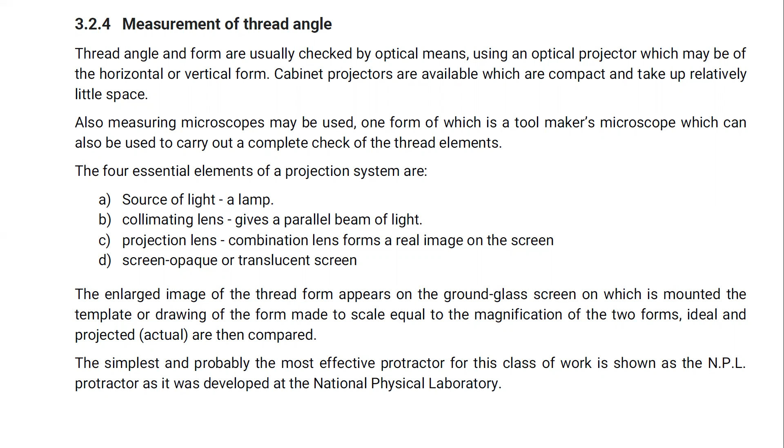A vernier protractor of this type usually has a circular scale calibrated in half degrees, with minutes of arc being read off a tangent screw dial.

Each flank angle is measured separately, the protractor arm being rotated in turn to each flank of the projected thread image. Hence, the thread included angle theta is the sum of the two flank angles, theta/2 plus theta/2.

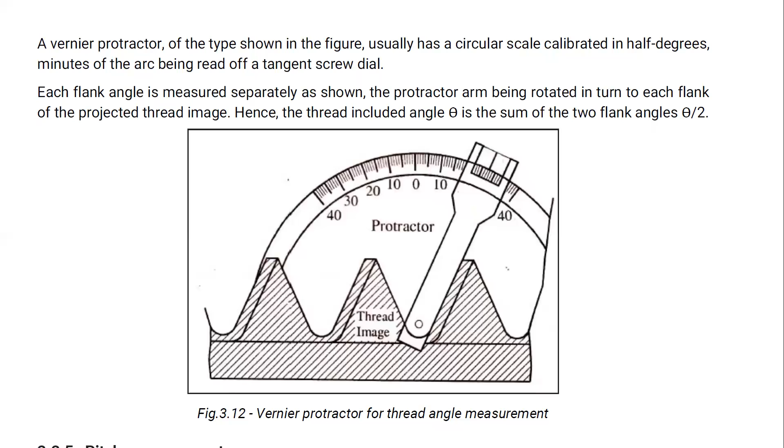Now we will see about pitch measurement. The errors in pitch of a nut or bolt have a serious effect on the accuracy of fit produced, so it is to be measured more accurately using a pitch measuring machine.

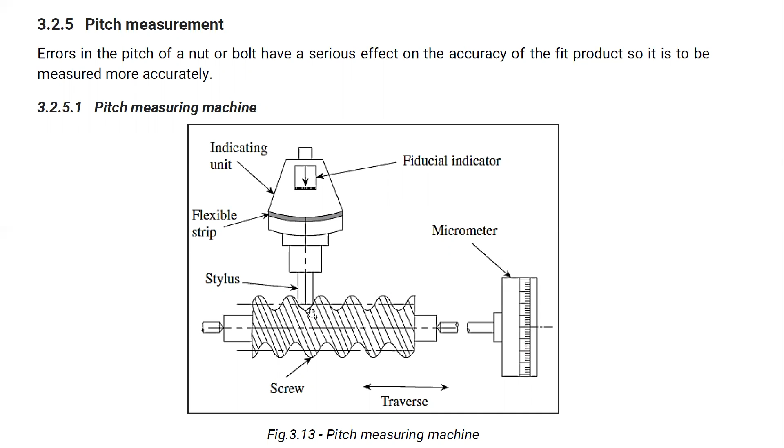The measurement of pitch of a screw thread by pitch measuring machine is a relatively simple and accurate method. The threaded component whose pitch is to be measured is mounted between the centers on the pitch measuring machine, as shown in the figure.

Then a spring loaded stylus of a size such that it contacts the thread flank at a point near the pitch line, as shown in the figure. The stylus touches the pitch line and is spring loaded.

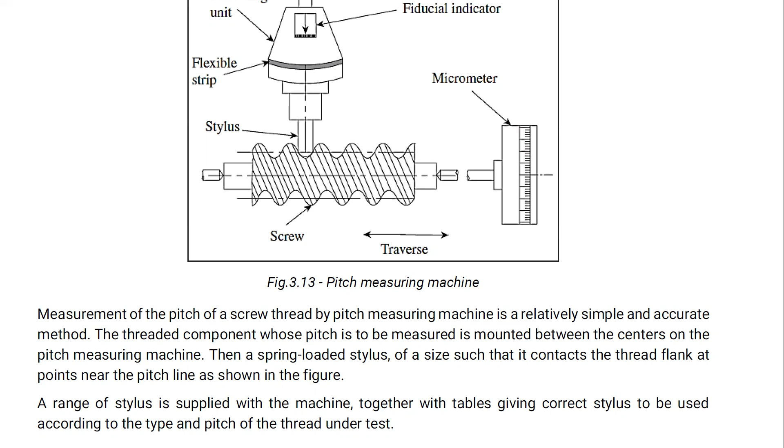A range of styluses is supplied with the machine, together with a table giving the correct stylus to be used according to the type and pitch of the thread under test. The styluses are available in a wide range, and we must select the appropriate one according to the type and pitch of thread being measured, so it fits correctly within the thread.

When the stylus is correctly positioned in the V, the carriage of the machine which carries the stylus and indicator can be displaced parallel to the work axis by means of a micrometer screw to which a large dial is attached.

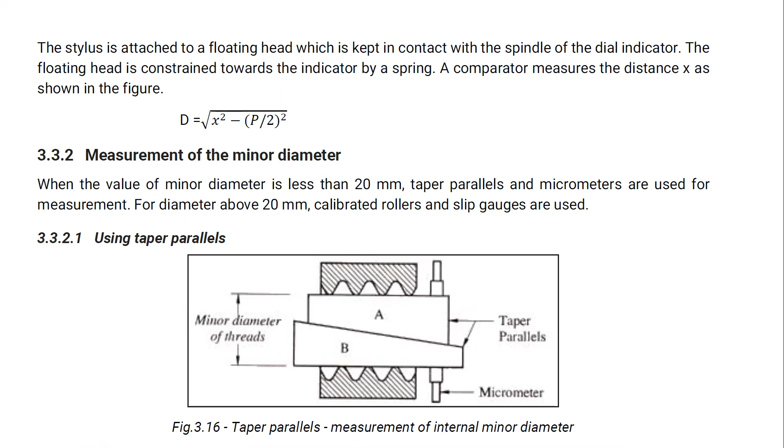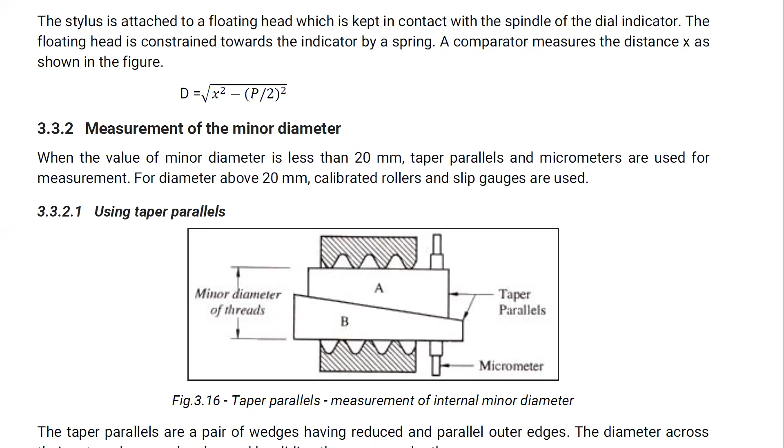When the value of the minor diameter is less than 20 mm, the taper parallel and micrometer are used for the measurement. For diameter above 20 mm, the calibrated roller and slip gauges are used.

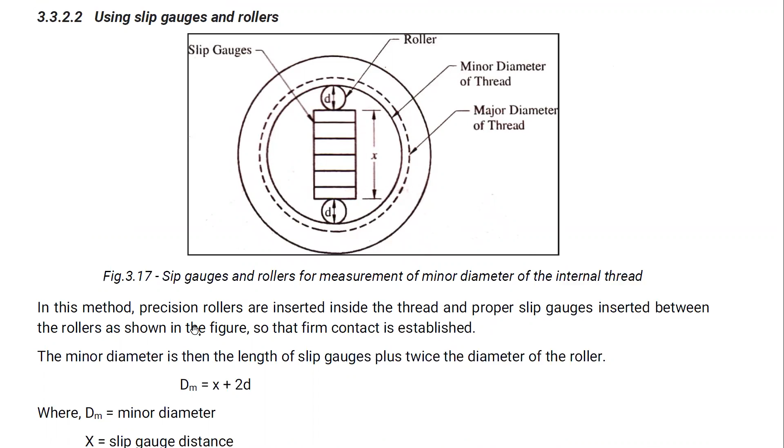In this method, the precision rollers are inserted inside the thread and the proper slip gauge is inserted between the rollers as shown in the figure so that firm contact is established.

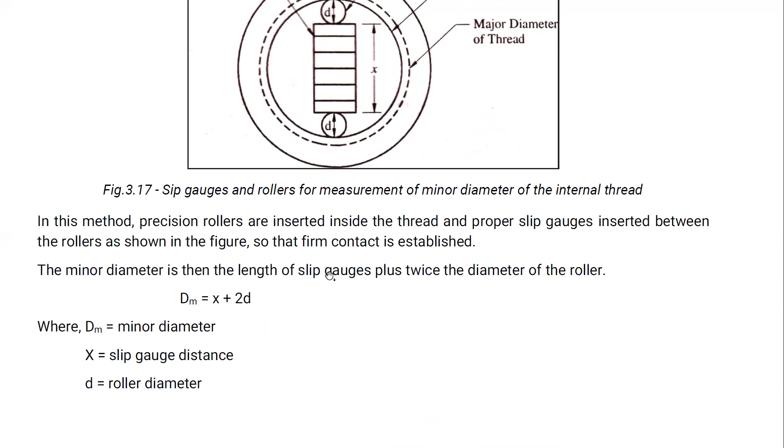The minor diameter is then the length of the slip gauges plus twice the diameter of the roller. As we know the equation, x plus 2 times the diameter. So we can measure the minor diameter with this equation.

Now, measurement of effective diameter. Another remaining parameter for the internal screw thread is the effective diameter. For that, we will be using this assembly for measurement of minor diameter.

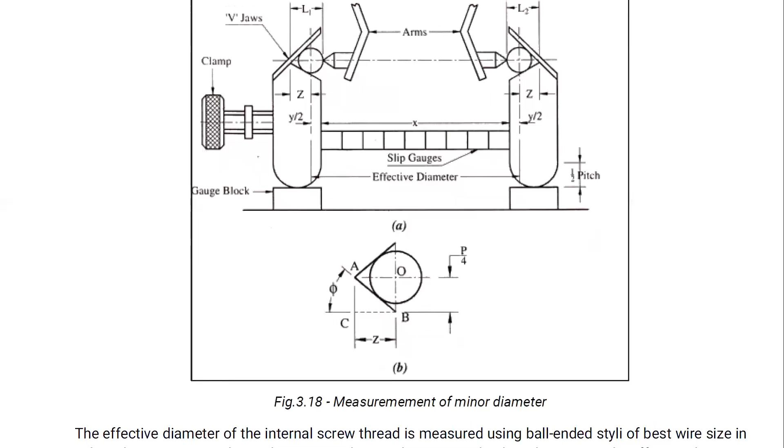Here are the slip gauges and this is the effective diameter which we are supposed to measure, and this is the gauge block, and this is one assembly or the V-jaw we will be using for measurement, and this one is the arms for supporting these rollers.

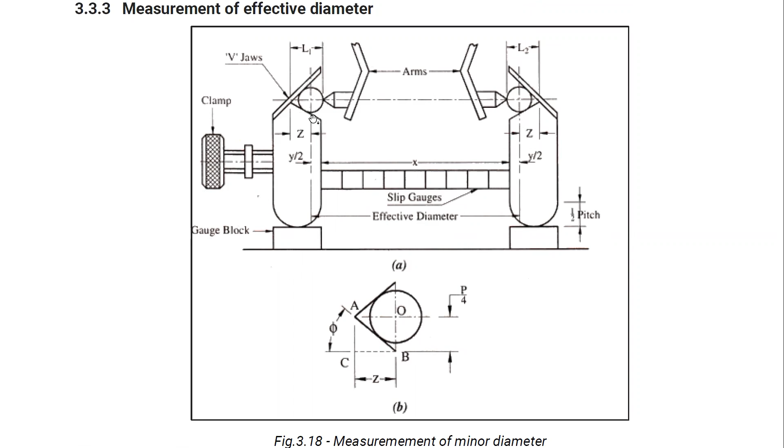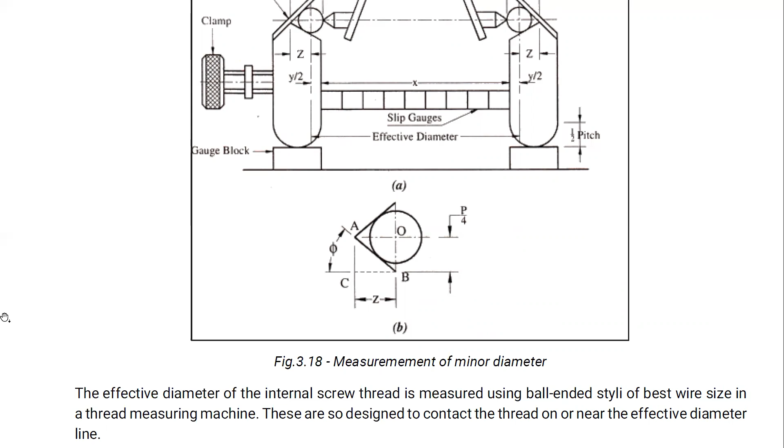We will see in detail the effective diameter of internal screw thread is measured using the ball-ended stylus of best wire size in a thread measuring machine.

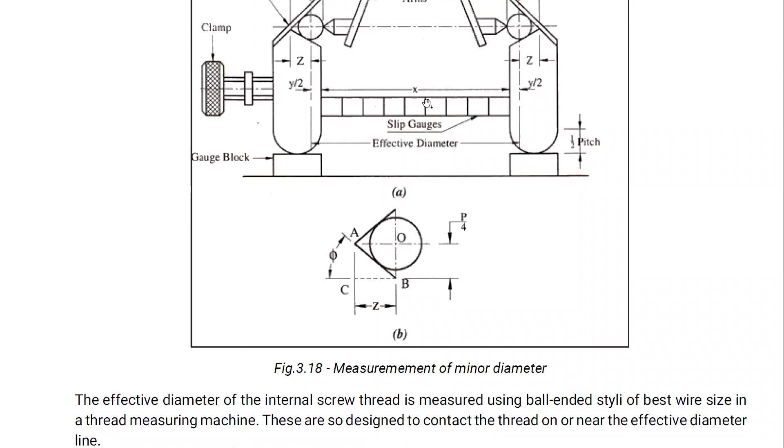For different threads, a different stylus is needed. The machine is set to master consisting of a pair of V-notch arms analogizing the thread as shown in the figure. V-notches in the jaw blade are chosen to correspond to the included angle of the thread to be measured,

and the size of the gauge block combination is determined from the knowledge of the thread pitch and a constant for jaw blade. V-notches are separated by slip gauges of length x, which gives the effective diameter.

Suppose the pitch is P and phi is the flank angle.

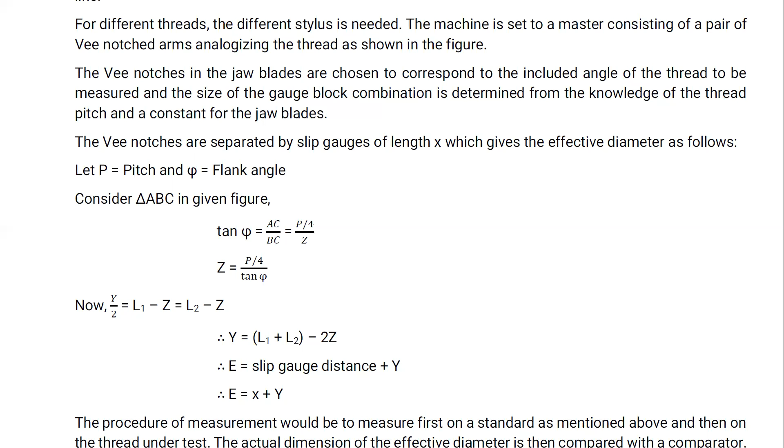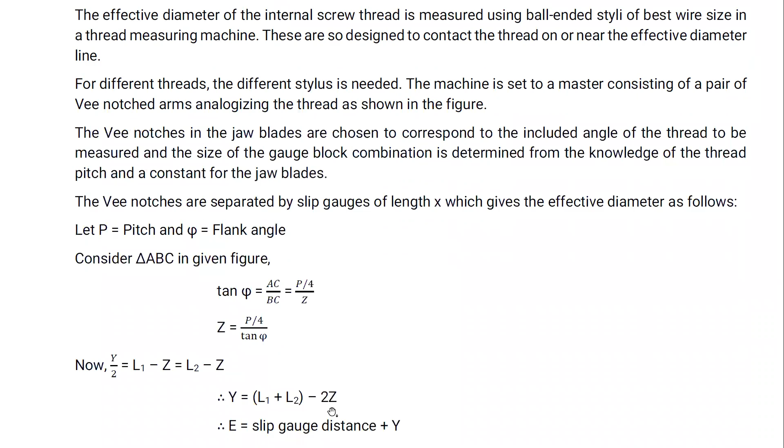So here we can measure Z is equal to P by 4 upon tan phi.

And now y by 2 is equal to L1 minus Z, is equal to L2 minus Z. So we can measure y is equal to L1 plus L2 minus 2 times Z,

and the effective diameter E is the slip gauge distance plus y. So E is equal to x plus y.

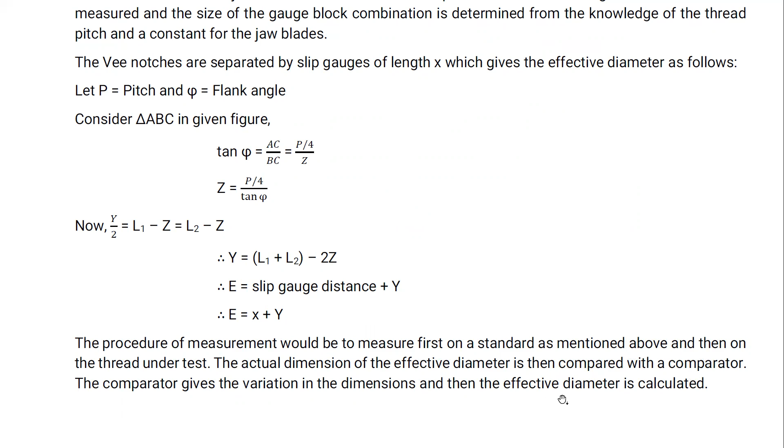The procedure of measurement would be to measure first on standard as mentioned above, and then on the thread under test. The actual dimension of the effective diameter is then compared with a comparator. The comparator gives the variation in the dimension, and then the effective diameter is calculated.

So this is how we are supposed to measure the effective diameter.